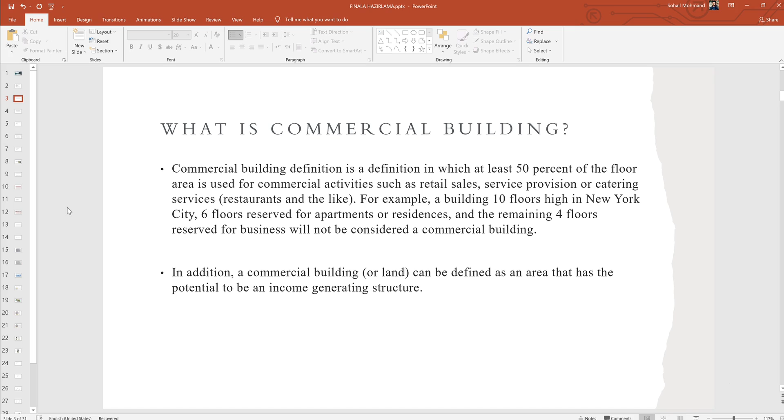In addition, a commercial building or land can be defined as an area that has the potential to be an income-generating structure. So what about communal spaces?

Common spaces are basically a more organized version of public spaces. They bring out all the benefits of public spaces while eliminating side effects such as crime and garbage. Regardless of the building type, every building should contain common areas - housing, factory, hospital, prison, whatever you name it. There is always a need for a common space.

So we as architects should feel compelled to include appropriate communal spaces in our architecture for the following 5 reasons: awesome functionality, awesome aesthetics, social interaction, sharing of knowledge and ideas, and also reduction of racism and inequality.

We can safely conclude that the inclusion of common areas in architecture is very beneficial for both architects and users. The resulting building design not only serves society but also satisfies the architect's desire to highlight his building as a well-functioning miracle.

If all architects make a habit of adding good common areas to every building they design, we can achieve a major social reform. So, different types of commercial properties and their subcategories: industrial, retail, office, multi-dwelling units, luxury home, hotel and lodging, restaurants.

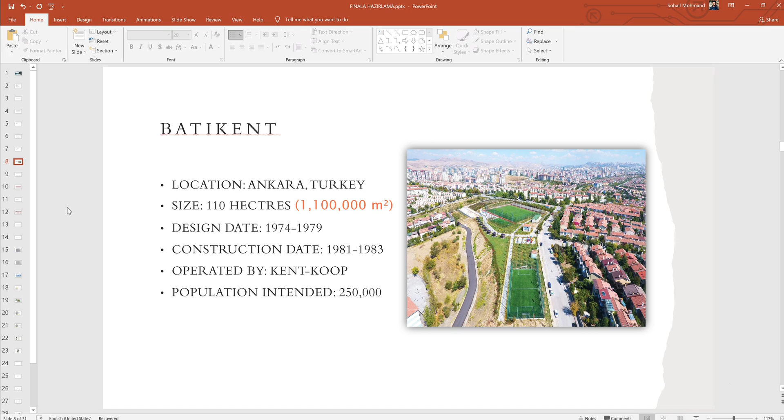Operated by Kent-Koop, with an intended population of 200,000 to 250,000 persons. The Batıkent project is located north of the Ankara-Istanbul highway, 13 km from the city center, on an area of 1,034 hectares. It is the largest public housing area in Turkey and in the world.

As the first example, the mass housing law and mass housing administration were born as a result of this project. 53,351 residences were completed in Batıkent, and the population exceeded 213,000.

In the Batıkent region, apart from the housing cooperatives, land was allocated to 18 collective workplace cooperatives, and 617 workplaces, all completed by these cooperatives, were offered to serve Batıkent residents.

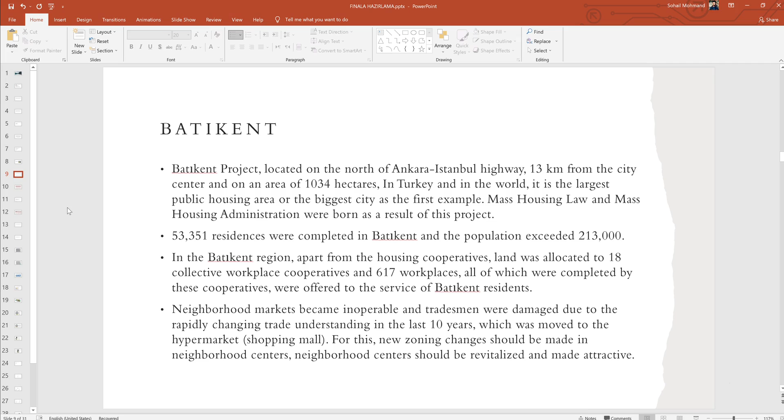Neighborhood markets became inoperable and tradesmen were damaged due to the rapidly changing trade understanding in the last 10 years, which moved toward hypermarkets and shopping malls. For this, new zoning changes should be made in neighborhood centers. Neighborhood centers should be revitalized and made attractive.

So, different aspects of the Batıkent project on social life: contribution to supporting the urban cooperative movement and the cooperative movement as a whole, contribution to the development of housing and urban policies, effects on local and national policies, mass housing law, planning, and project implementation success, contribution to the creation of a sociologically desirable and sustainable environment.

Helping people help themselves through cooperatives and other civic initiatives to provide affordable accommodation to those who demand it, to develop an integrated community, to design a healthy environment, promoting civil engagement and accountability through a collaborative self-help organization.

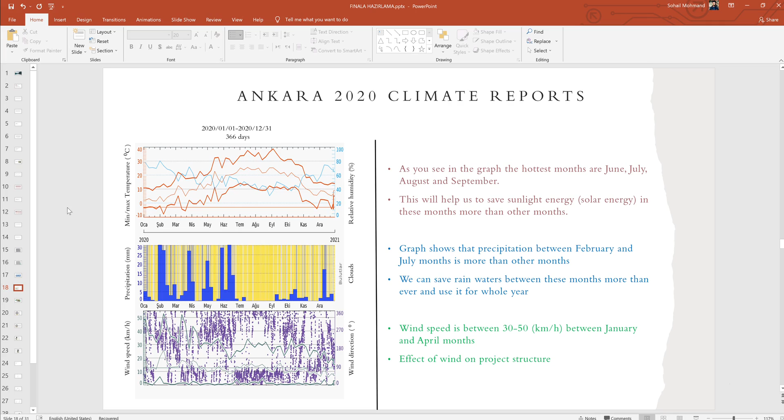Wind speed is between 30 and 50 km per hour between January and April. The effect of wind on the project structure is also an important thing.

Structures group of the Batıkent area: industrial complex, crafting zone, high-rise apartment, commercial areas, park and recreational, low-rise apartment, mid-rise apartments, and social facilities.

Why did I choose this area for my project area? The reason is it is near two stations of the metro, Batikent and Batimerkez, which makes the accessibility of this area easier.

This area is the center of Batikent, between main roads, near two metro stations. As I told you, it is not an active area. It will be a gathering area for Batikent, an example for sustainable structure as well.

This parcel is about 85,000 meters square, so it will be a proper area for an urban plan design project. The aim is to connect the settlement with a communal structure completely and sustainably.

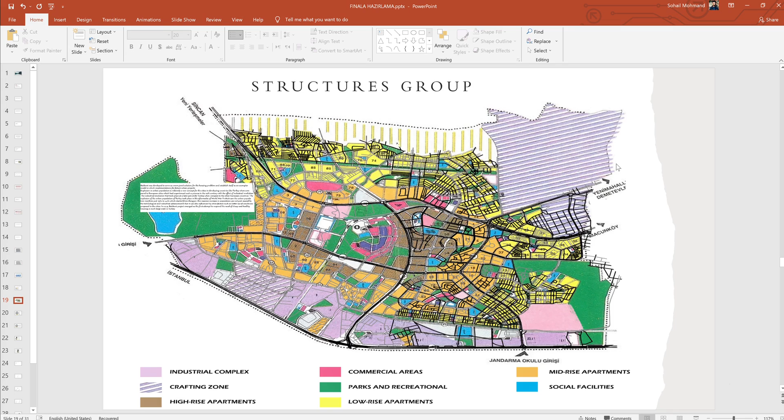My project name will be Life Center Communal Living. The proposal for this project is that it will be a socially sustainable residential hub, using a climate-smart and economically varied housing model, to test architecture's capability to foster sustainable living.

The project will provide more compact apartment units in an area of 85,000 meters square. Despite the high density and block arrangement, it will include many common areas, open and unplanned. These spaces are intended to act as shared knowledge and resource points, consolidating waste and fostering a greater sense of community interaction within the complex.

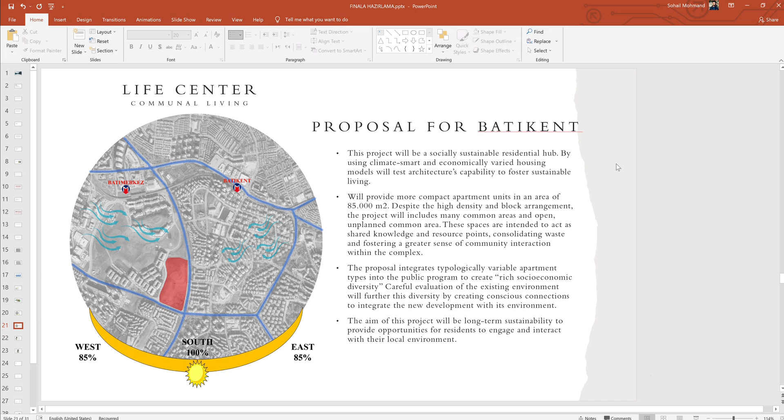The proposal integrates typologically variable apartment types into the public program to create rich socioeconomic diversity. Careful evaluation of the existing environment will further this diversity by creating conscious connections to integrate the new development with its environment. The aim of this project is long-term sustainability, to provide opportunities for residents to engage and interact with their local environment.

The concept diagram of this project: as you see, the first step is a prism that forms a closed city block, meaning a safe courtyard. Then, for permeability and routes connection, there will be some connections with the roads.

Also, raising and lowering some parts of the blocks creates a diverse and lively city block. The cutting part of the blocks is sloped, with a sloped wall for uniqueness and also for renewable energy and for the conservation of rainwater.

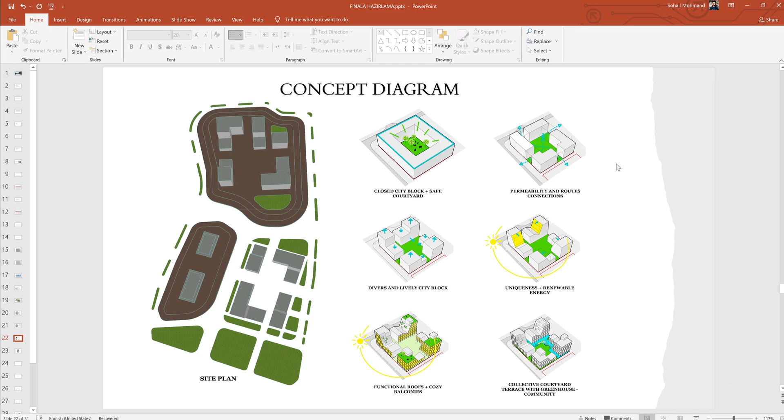Functional roofs and also cozy balconies, collective courtyard, terrace with greenhouse community. The program analysis of this project will be about...

The green roofs, as you see, some parts of this project will be used for the green roof, and some parts also covered with solar panels, and also used for conservation of rainwater.

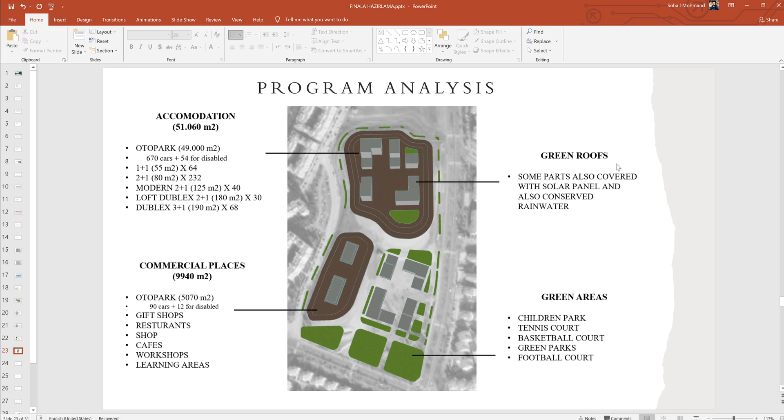Drawing of this project will include plans, sections, elevations, and renders.

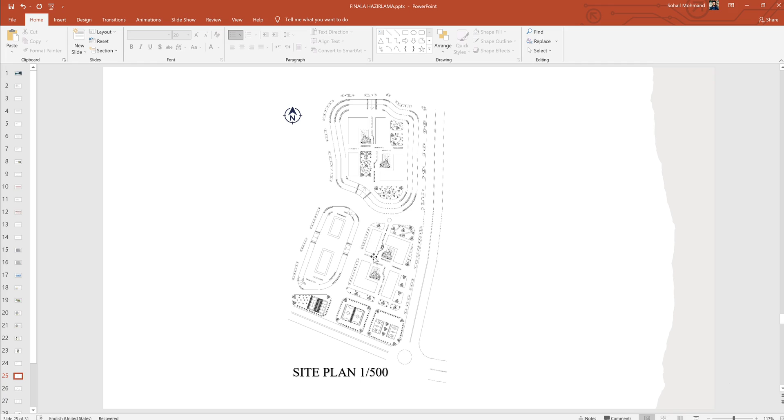So the first ground of this project will serve for commercial use. This is a fully commercial area, and also you see the green areas, the courtyard with football, basketball, tennis, and also some children's parks that serve these blocks inside the safe courtyard.

This part will have a 2 story auto park below, first story for the commercial one, and also 3 stories for this one, started from 0.00 and going up because it is a sloped area.

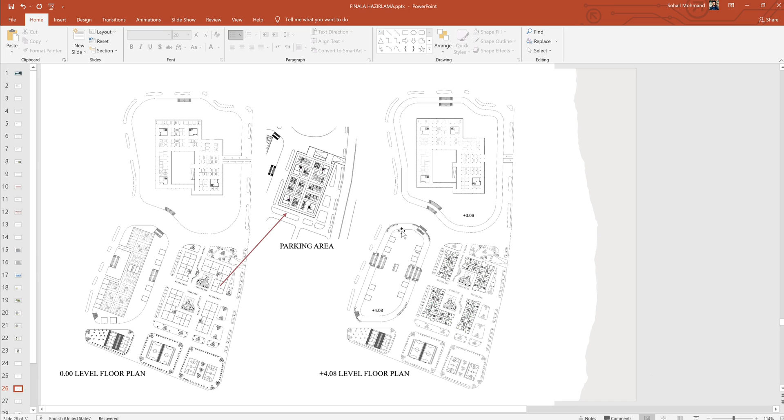The second floor plan, 4.08 level, shows the residential part starting from there. Again, the auto park and also some commercial areas located inside that serve this road of the commercial part. The 7.14 level floor plan shows the start and beginning part of the commercial areas.

And also the second floor of the residential area. Again, the auto park of this part.

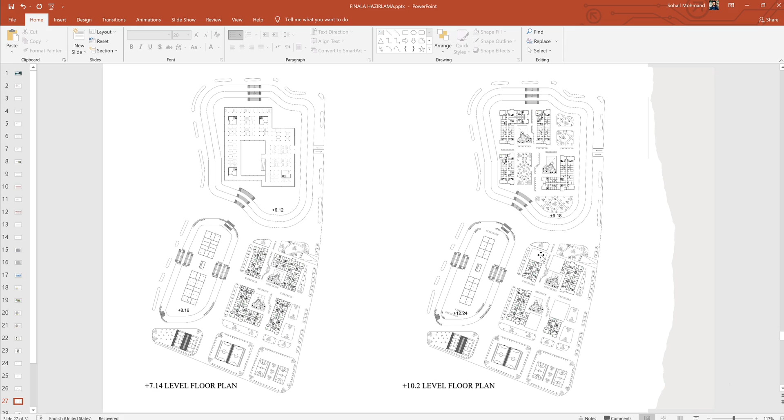In this plan you see that at the 10.2 level floor plan, the residential area starts from this part, for this part they start from this level, and also you see the cutting of some parts of these blocks that, as I showed in the concept diagram, is used for green roof, and also the roof of other parts will be covered with solar panels for saving energy.

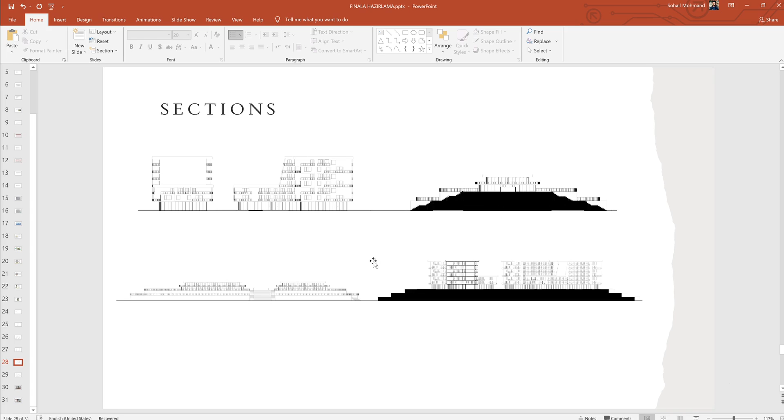The sections of this project show the connection of residential and commercial area with the fully commercial area, the stairs are cut to show this, and also the connection of the upper public part of the project with the commercial area of this project.

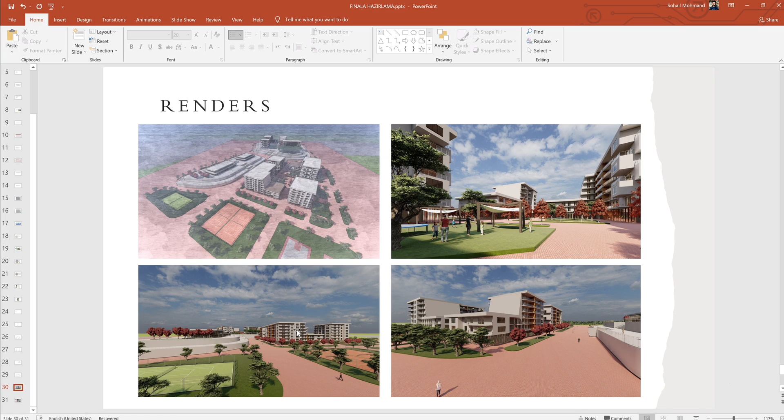The safe courtyard, and also you see the green roof of this part as well, the sloped wall used for conserving rainwater and also for saving renewable energy. And that's it. Thank you for your attention.